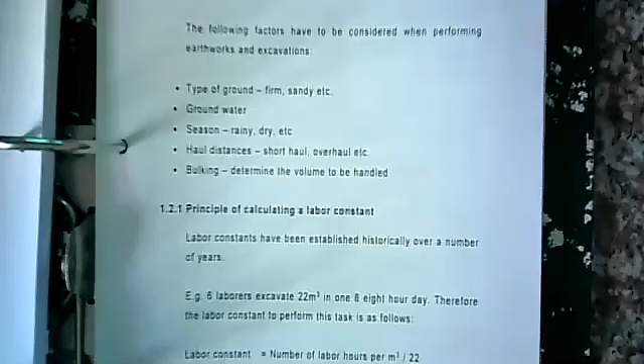Type of ground: firm, sandy. Earthworks excavation is basically governed by the different types of conditions we experience. Now, if your ground is firm, what does it mean? It means that the machine has to work harder.

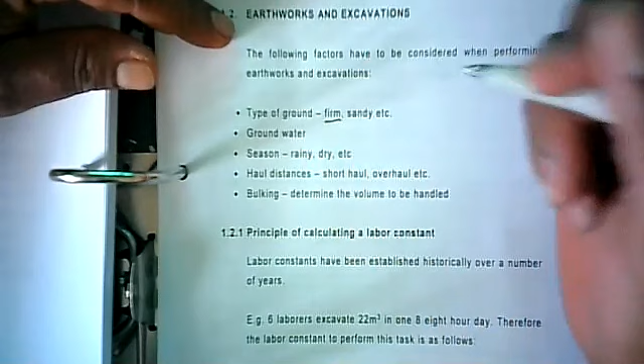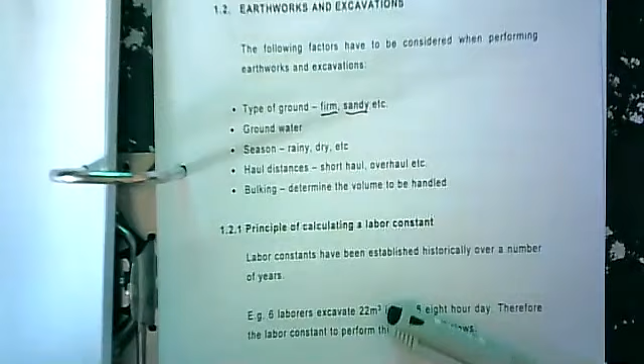Naturally, if the ground is sandy and very soft and loose, the machine does not have to work as hard as it was with firm ground. Now, this has an implication on a couple of things: one, cost, and two, duration. Remember, harder, therefore it's going to take longer.

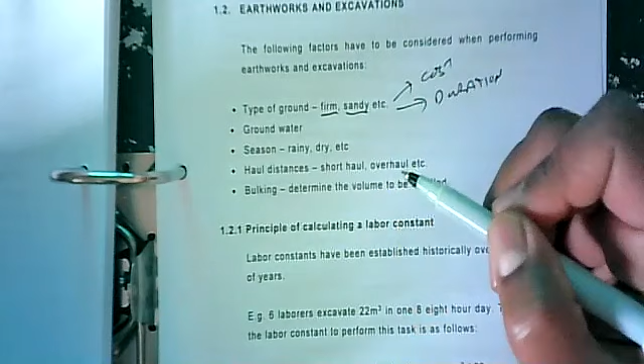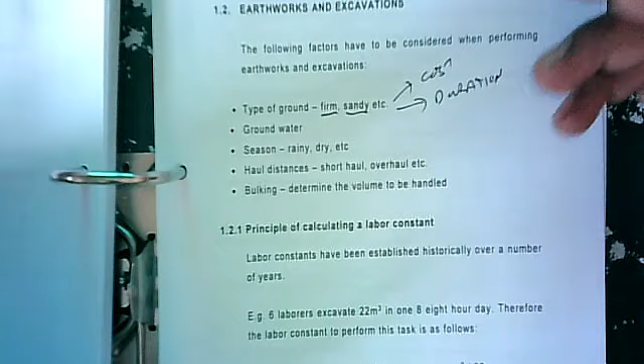And if it's going to take longer, it's going to cost more. Also, if it's harder, it's going to work more, which means it's going to use more fuel at a longer period. So fuel cost is going to go up. Naturally, the operating cost is also going to increase because the time taken is more than it would have been if it was loose soil.

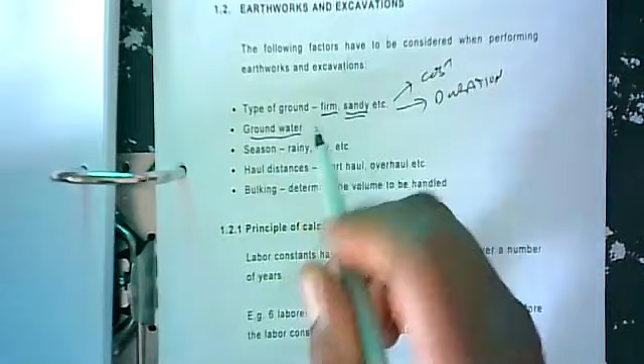Why is groundwater an issue? Firstly, what is groundwater? Groundwater is the water table. Why is groundwater a condition for earthworks and excavation? If you're working close to the ocean, every time you dig a little hole, it fills up with water. You dig a bigger hole, it's going to fill up with water. So to continue working, you have to put in some sort of pump to suck out all that water.

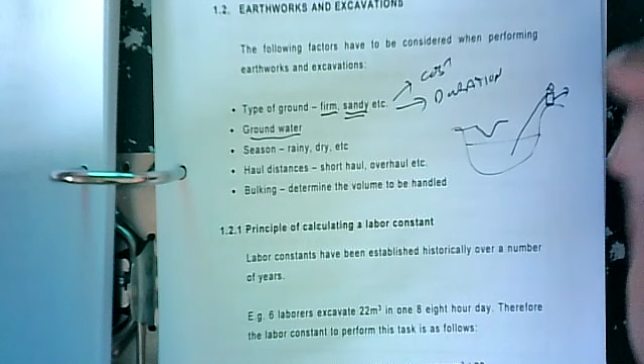So there you go. Groundwater is an issue for earthworks, and in almost all instances it has a cost implication.

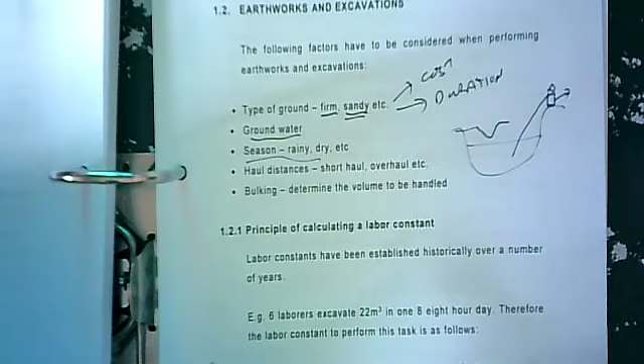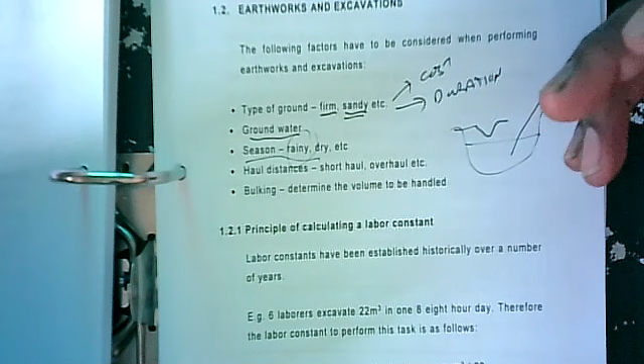Season. Why is season an issue? If it's raining, can you work? Another question: when the rain stops, can you still go back to work? No. If it rained hard enough, then you're going to have to wait for a couple of days for that water to subside, so that the site is actually walkable.

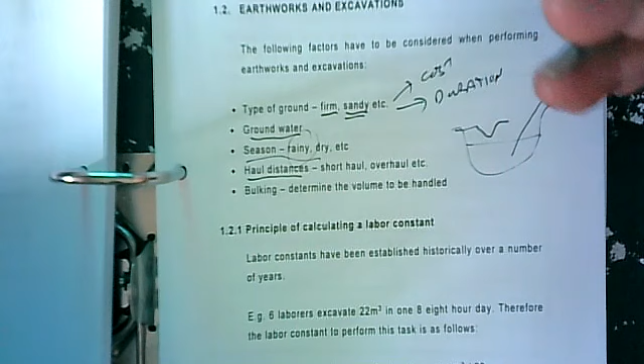Haul distances. Whatever you excavate needs to be taken someplace. Do you take it a few meters away? Do you take it kilometers away? And therefore you see how the cost starts to climb when it comes to earthworks and excavations.

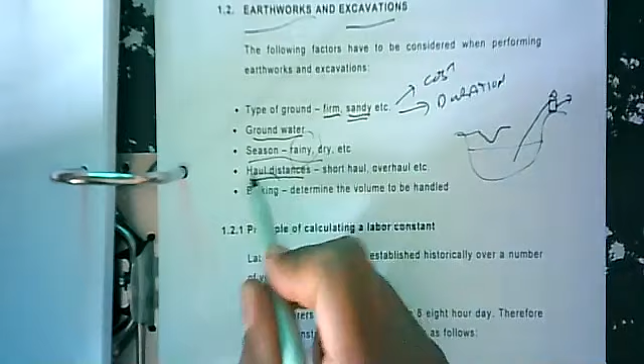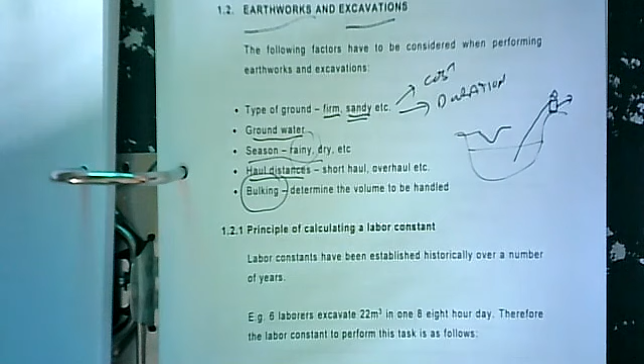Bulking: determine the volume to be handled. We'll talk about bulking when we start the calculations, but bulking is basically disturbing the soil and introducing voids, and that has an implication on volume. We'll come to that in a moment.

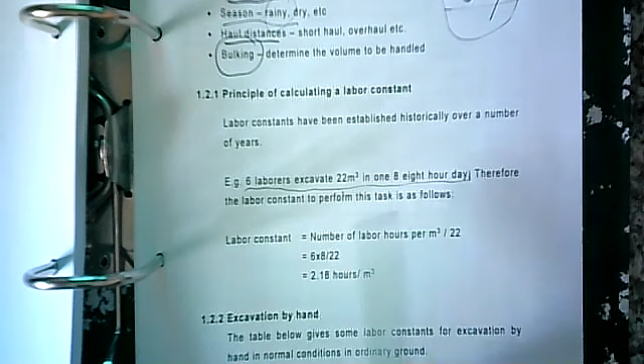Principle of calculating a labor constant. Labor constants have been established historically over a number of years. Example: 6 laborers excavate 22 cubic meters in one 8-hour day. We've established that previously when we started. Therefore, the labor constant to perform this task is as follows: number of labor hours per meter cube divided by 22, and you get 2.18 hours per cubic meter.

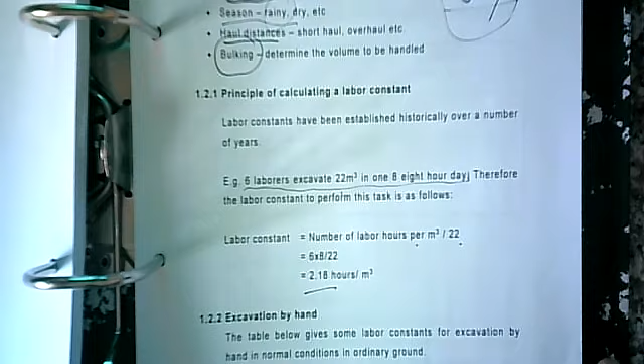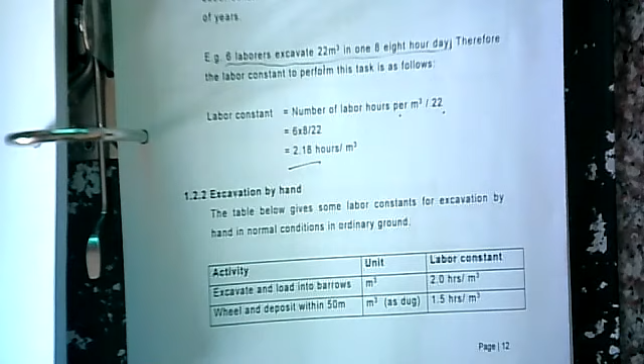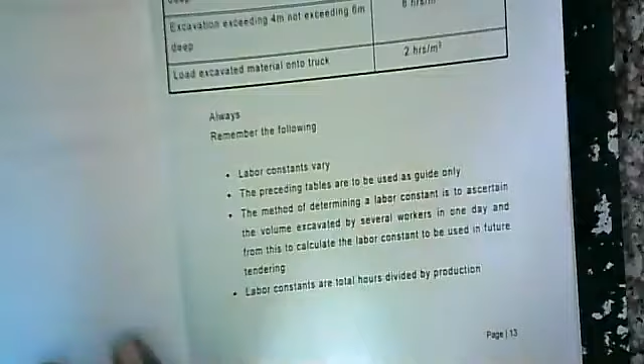Spread and level, return, fill, and compact - other activities when it comes to excavation. As dug, which actually should read something like that.

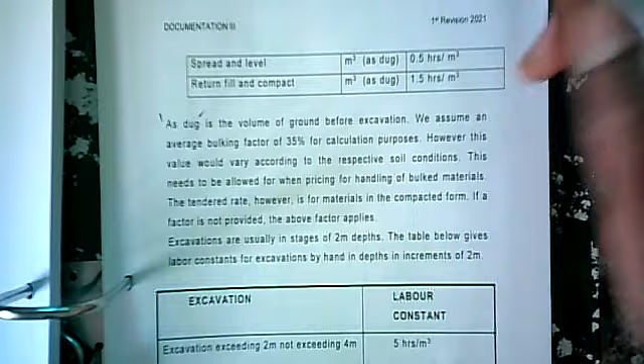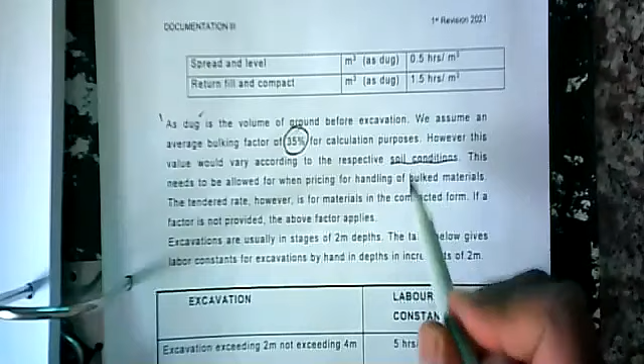As dug is the volume of ground before excavation. We assume an average bulking of 35% for calculation purposes. This is going to change, and it's going to change depending on the type of soil. You will see in the calculation it's coming out. However, this value will vary according to respective soil conditions, as I've already mentioned. This needs to be allowed for when pricing for handling of bulk materials. The tender rate, however, is for materials in the compacted form. That's scary.

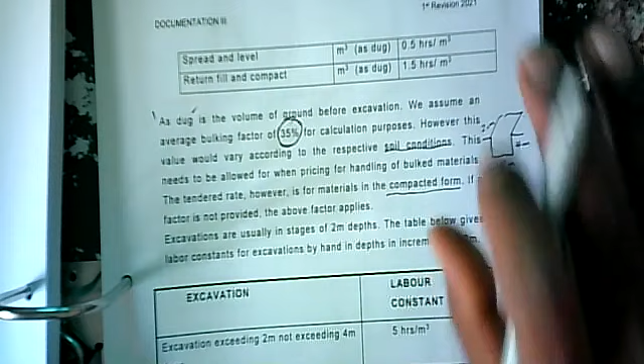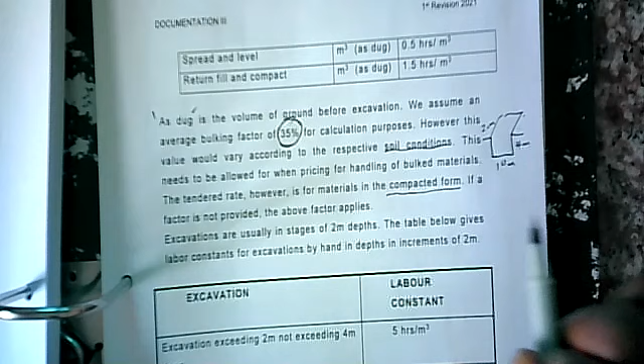If we dig this hole, we know the dimensions, we know the volume, and from that we get volume. I'm only paying for that volume. I don't care if you use 10 trips with 10 trucks, 5 trips with 10 trucks, or 20 trucks with 2 trips. I don't care, I'm paying just for that amount excavated.

That's what this line means, strictly: if a factor is not provided, the factor above applies. So if I don't give you a bulking factor, use 35.

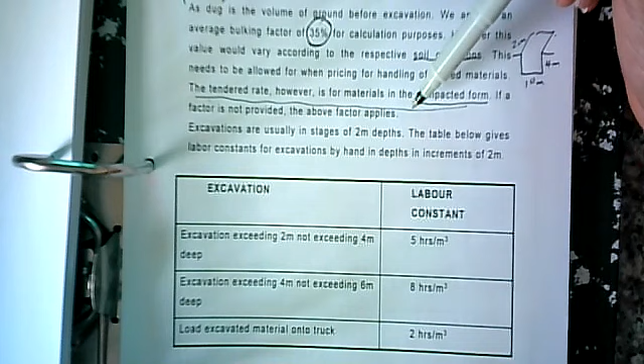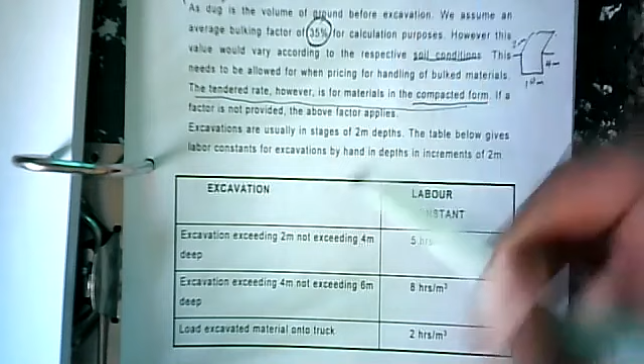Excavations are usually done in stages of 2-meter depths. The table below gives labor constants for excavations by hand in increments of 2 meters: excavation exceeding 2 meters but not exceeding 4 meters gives you limits, 2 to 4, labor constant is 5. Excavation exceeding 4 meters, not exceeding 6...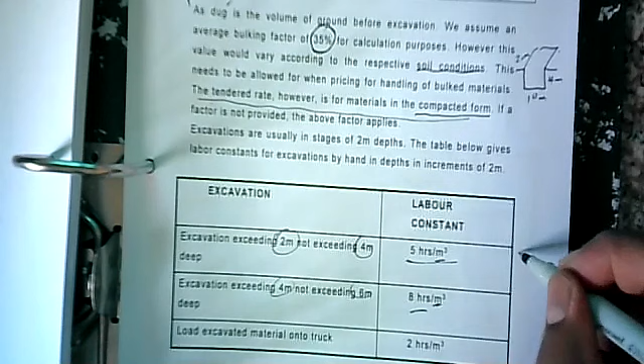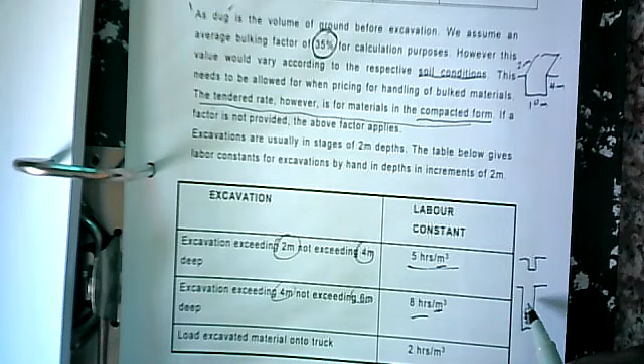What's happening here? The deeper I go, the longer it takes to do 1 cubic meter. Why? Think about a hole like that as opposed to a hole like that. The guy is busy in here with his pick, digging, and then he has to throw it all out. He throws it right there and it falls back in, as opposed to a guy in this shallower hole. Now you see why depth is an issue.

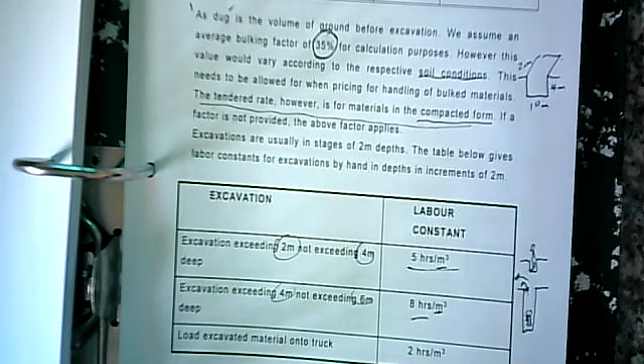Loaded excavated material onto the truck, 2 hours per cubic meter. By then, whatever the material, it's loose, so it's easier to scoop it up and throw it into the truck. Always remember the following.

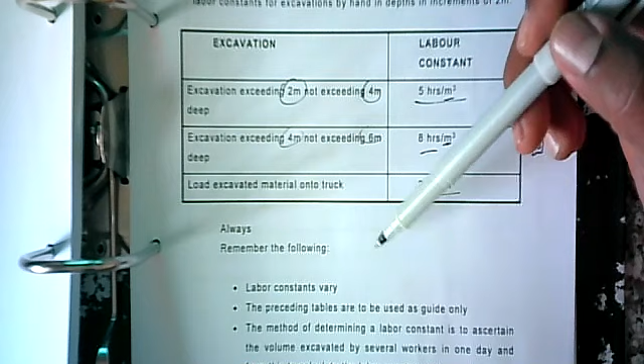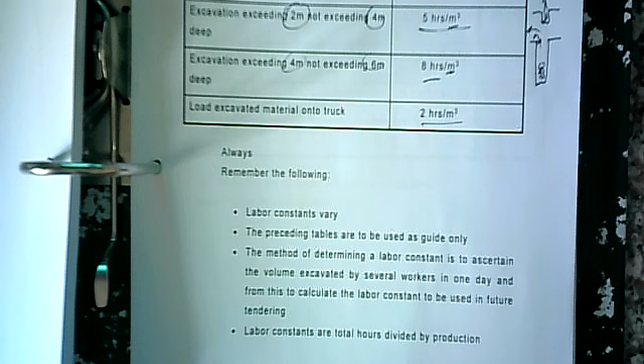Labor constants vary; preceding tables are used as a guide only. The method of determining a labor constant is to ascertain the volume excavated by several workers in one day, and from this calculate the labor constant to be used in future tendering. Labor constants are total hours divided by production.

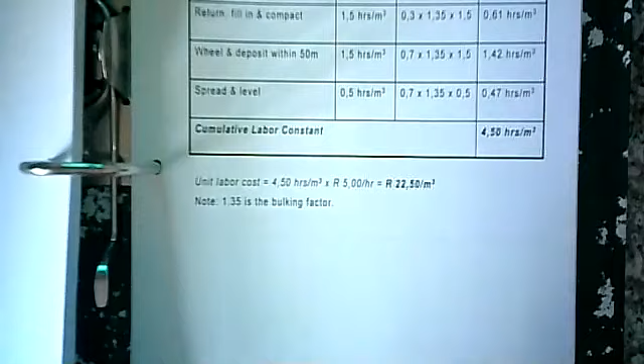Example 1: calculate the cost per cubic meter to excavate a trench 1.5 meters deep in gravel if 30% of the excavation must be returned, filled, and compacted. The rest is to be carted away, deposited, spread, and leveled on site. The soil bulks by 35%, and the labor cost is R5 an hour — very cheap labor.

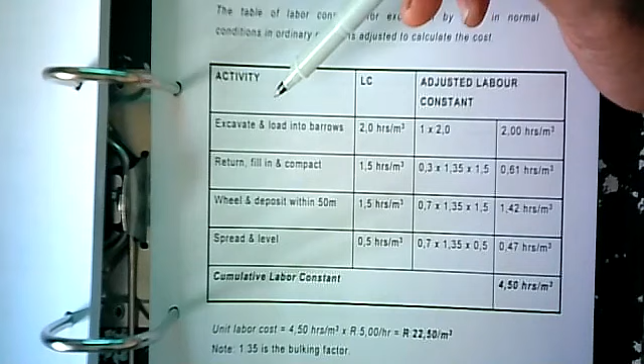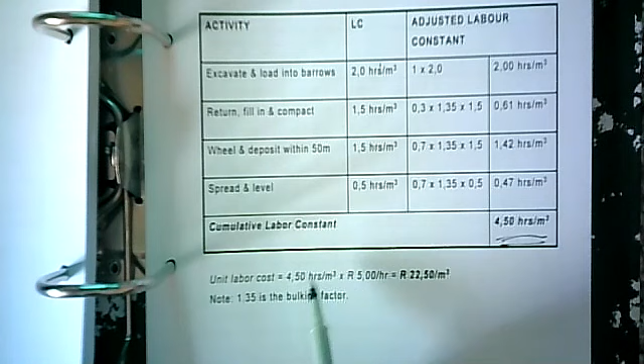Activity: excavate, load into barrows, labor constant — you can see how we arrive at the cumulative labor constant. Unit labor cost equals 4.5 hours per cubic meter at 5 Rand, giving us a cost per cubic meter. We said 1.35 is the bulking factor.

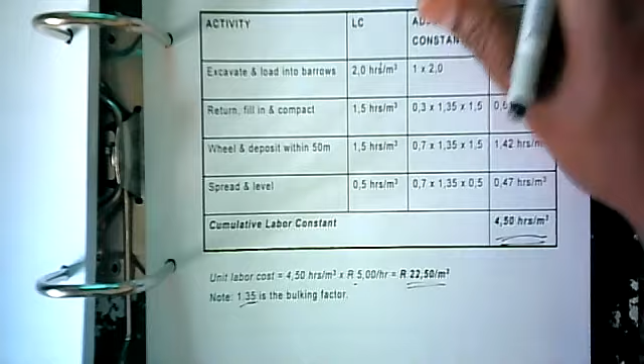I'll be honest with you, this calculation is for illustrative purposes only. I've seldom given you a question in a test or exam of this nature. For example 2, this starts to get complicated now, so let's pay more attention to this particular one.

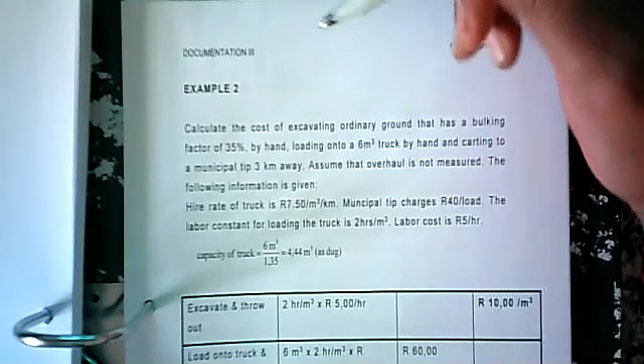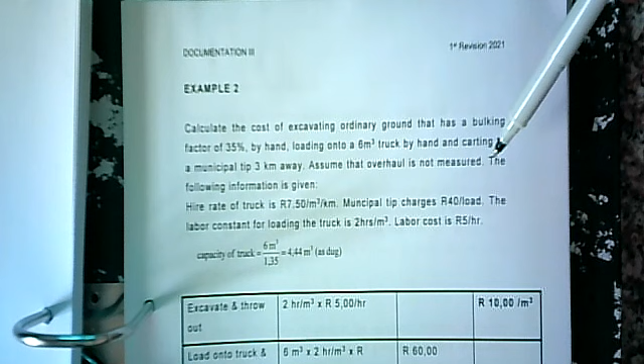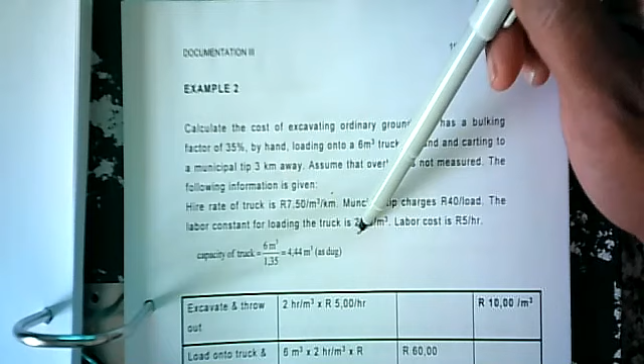Calculate the cost of excavating ordinary ground that has a bulking factor of 35% by hand, loading into a 6 cubic meter truck by hand, and carting to a municipal tip 3 kilometers away. Assume the overhaul is not measured. The following information is given: hire rate of truck is 7.50 Rand per cubic meter per kilometer, municipal tip charges 40 Rand per load, the labor constant for loading the truck is 2 hours, and the labor cost is 5 Rand per hour.

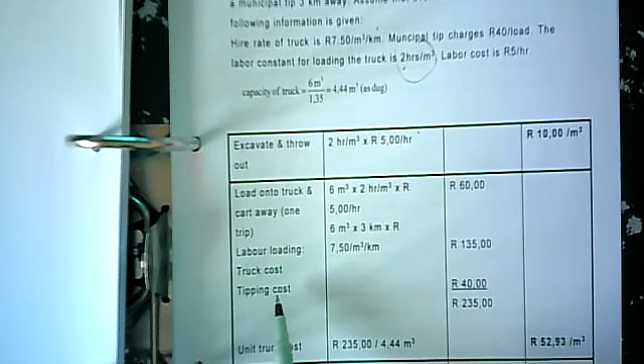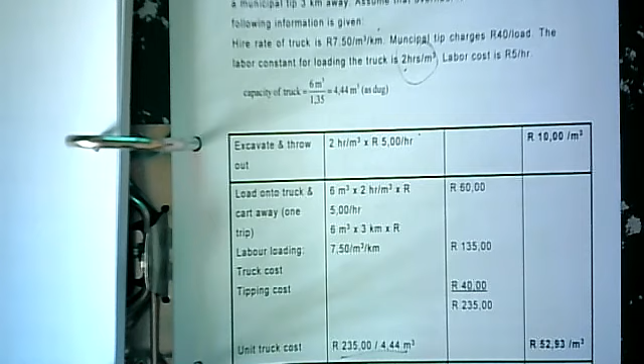So, excavate and throw, you've got something there: 2 hours per cubic meter at 5 Rand — there's a cost there. Load onto truck and cart away, 1 trip: truck, labor loading, truck cost, tipping cost all given in your question. Unit truck cost given, and we arrive at a cost for excavating and carting it away. This, mind you, is done by hand.

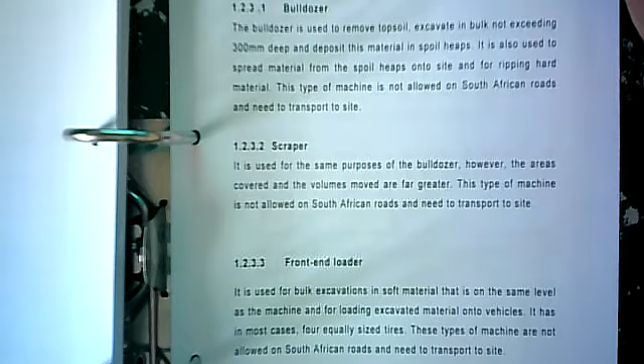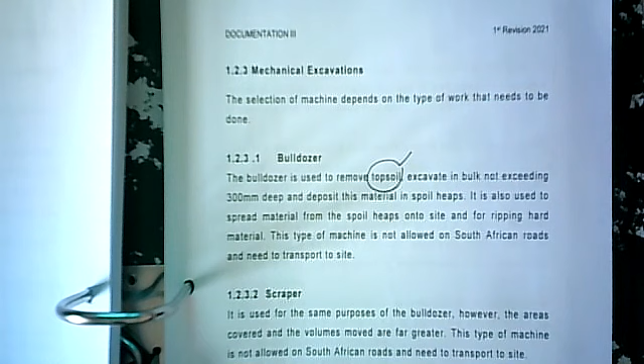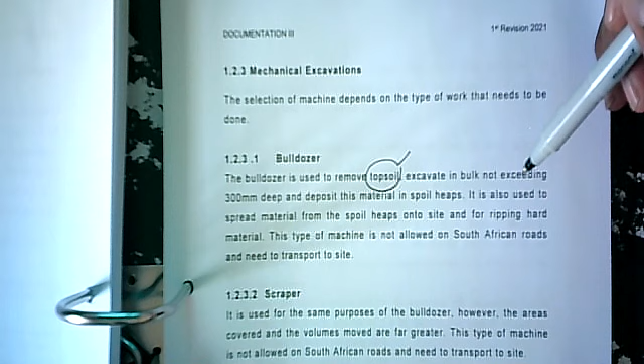Section 1.2.3, page 16, mechanical excavations. The selection of machine depends on the type of work that needs to be done. A bulldozer is used to remove topsoil — we'll start with topsoil quantities and do calculations in this regard. It excavates in bulk not exceeding 300 millimeters deep and deposits material in a spoil heap. It's also used to spread material from the spoil heaps onto site and for ripping hard material. This type of machine is not allowed on South African roads and needs to be transported to site.

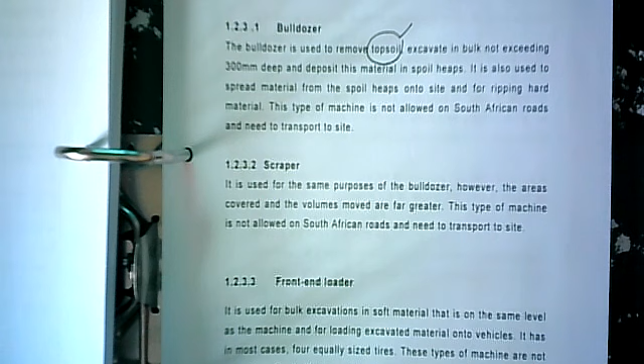A scraper is used for the same purpose as a bulldozer; however, the areas covered and the volumes moved are far greater. This type of machine is also not allowed on South African roads and needs to be transported to site. Front end loader...

It is used for bulk excavations in soft material that is at the same level as the machine, and for loading excavated material onto vehicles. It has, in most cases, 4 equally sized tires. These types of machines are not allowed on South African roads and need to be transported to site.

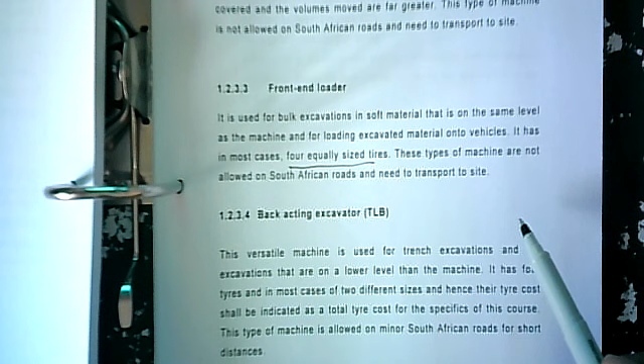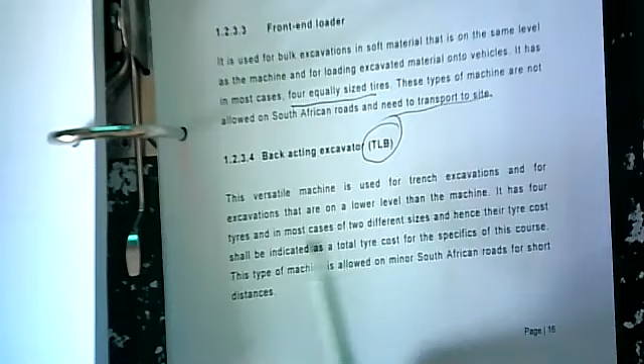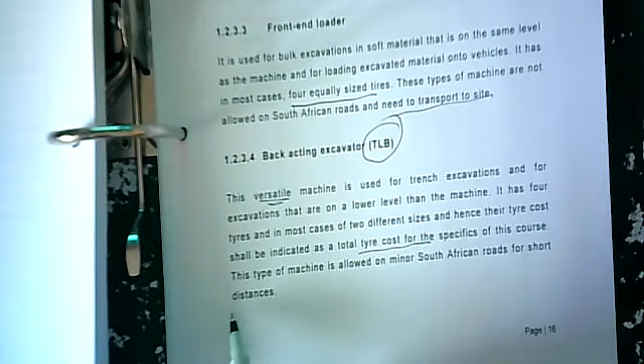All right, back actor or back actor excavator, TLB, a very versatile machine. You see it everywhere on construction sites. This versatile machine is used for trench excavations and for excavations that are on a lower level than the machine. There are 4 tires, in most cases 2 different sizes, and hence their tire cost shall be indicated as a set. This type of machine is allowed on minor roads for short distances. That's why you sometimes have to follow it on the road because it travels very slowly.

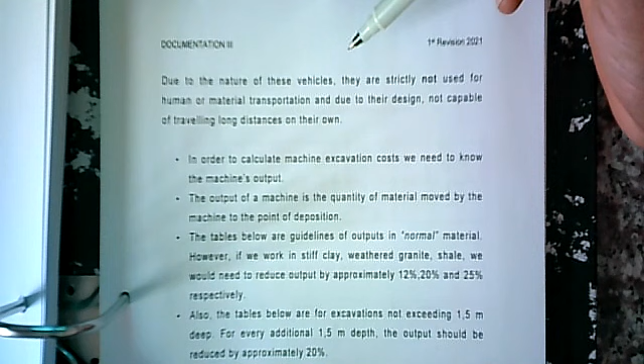Due to the nature of these vehicles, they are strictly not used for human or material transportation, and due to the design, not capable of doing long distances on their own.

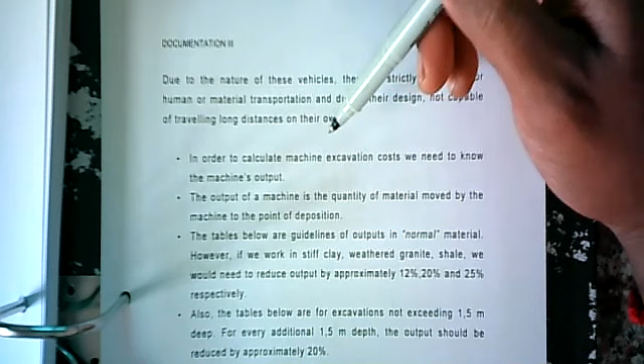In order to calculate machine excavation cost, we need to know the machine's output. Where do we get that from? The output of a machine is the quantity of material moved by the machine to a point of deposition - where we dig it, or we carry it from here and take it there. The tables below are guidelines of outputs in normal material.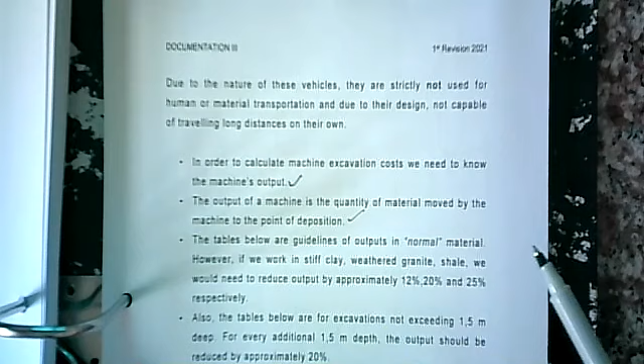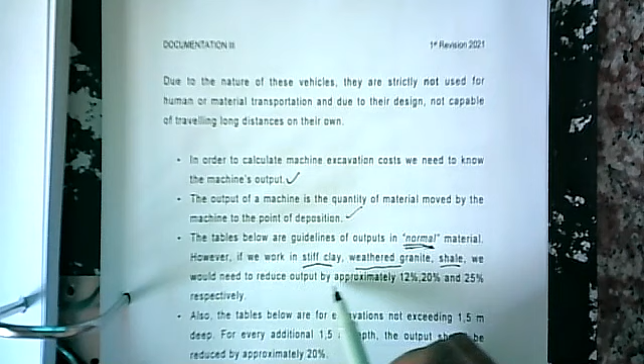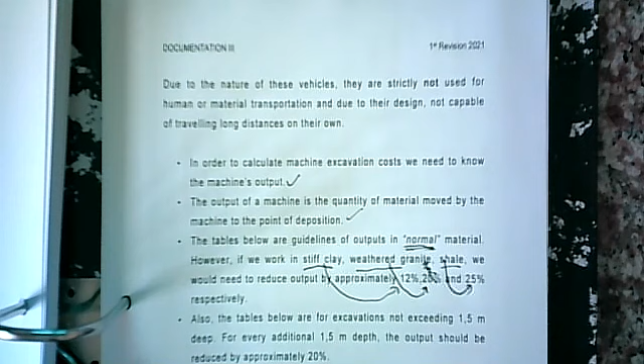Now it starts to get complicated. However, if we work in stiff clay, weathered granite, or shale, we need to reduce output by approximately 12%, 20%, and 25%. Also, the tables below are for excavations not exceeding 1.5 meters deep. For additional 1.5 meters depth, the output should be reduced by 20%. All right, this will all make sense in a moment.

Outputs are measured in cubic meters per hour.

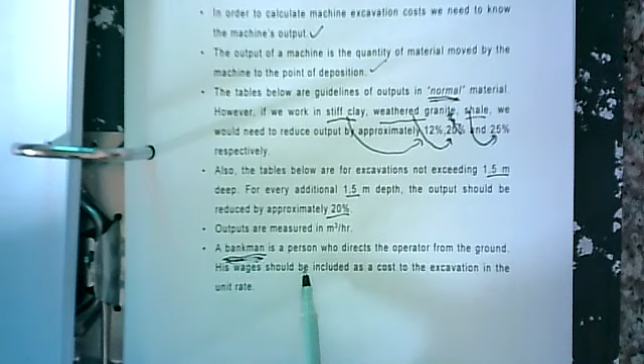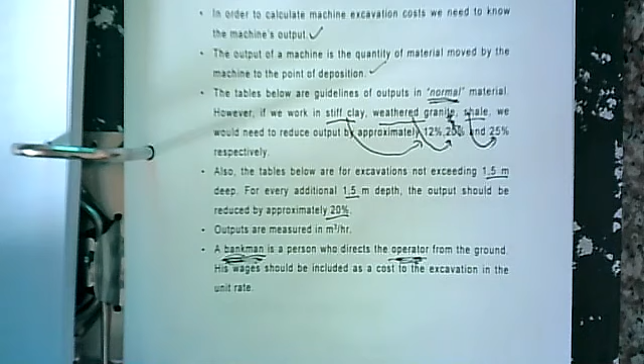A bankman is a person who directs the operator. Remember I said operating cost? We need somebody to use the machine or work the machine, and sometimes he may need somebody to help him, walking on the ground, so he doesn't crash into other items, buildings, or other structures. This is because of his location in the vehicle - it's hard for him to see from the ground. His wages should be included in the cost of the excavation in the unit rate.

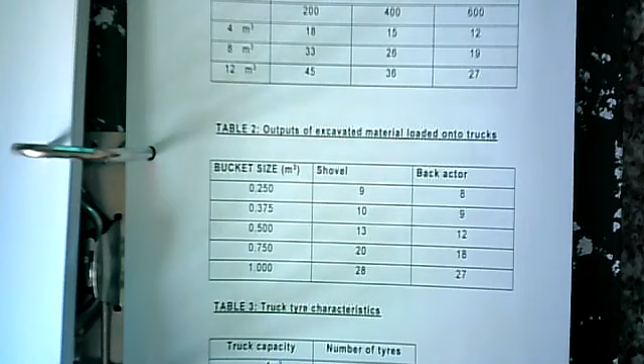All right, here's your tables. This is for your scraper. Let's look at table 2 - the bucket size and the shovel size for a back actor.

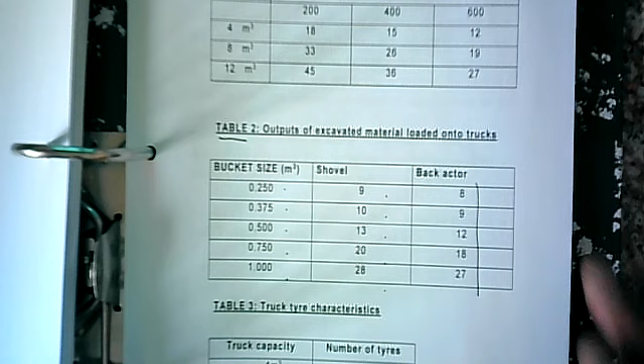Now this is a table that I'm going to give you in your data sheet. Let's look at this one question.

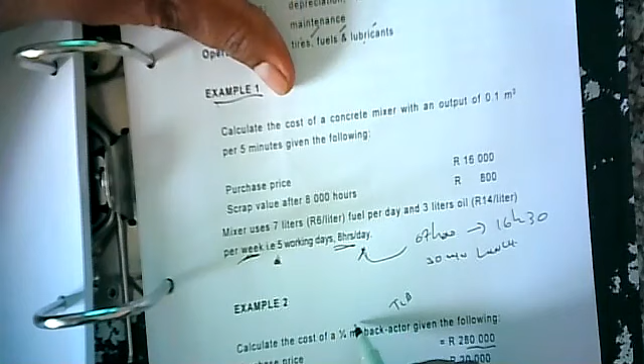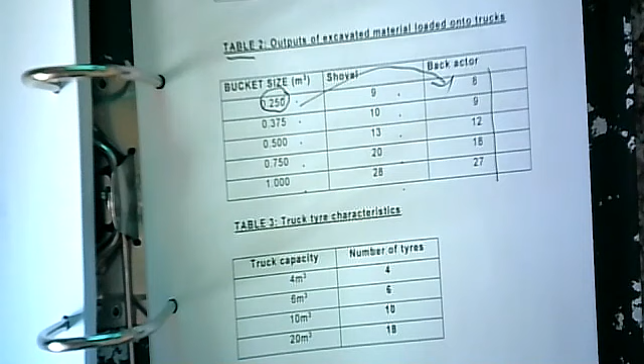Question 2, page 10. I said quarter cubic meter back actor. Remember that? Why did I say that? Because I said the questions are going to get more complicated. If I gave you a quarter cubic meter back actor, you're going to go to this table and look at a quarter cubic meter back actor. This is its capability per cubic meter - 8 cubic meters per hour.

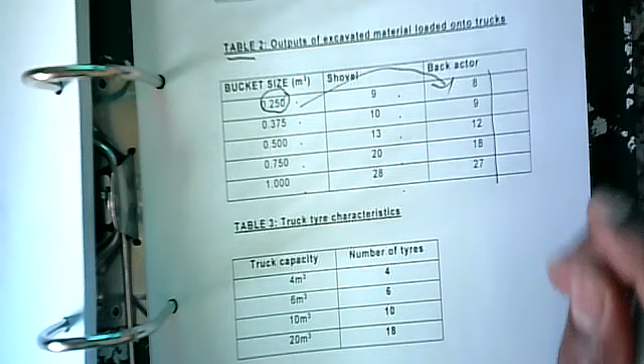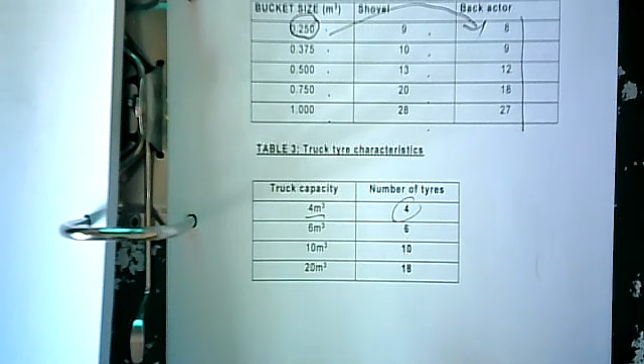That's its capability. All right, truck tyre characteristics. Now, I want to stick to this table. If it is a 4 cubic meter truck, it has 4 tires. If it is a 6 cubic meter truck, it has 6 tires. If it is a 10 cubic meter truck, it has 10 tires.

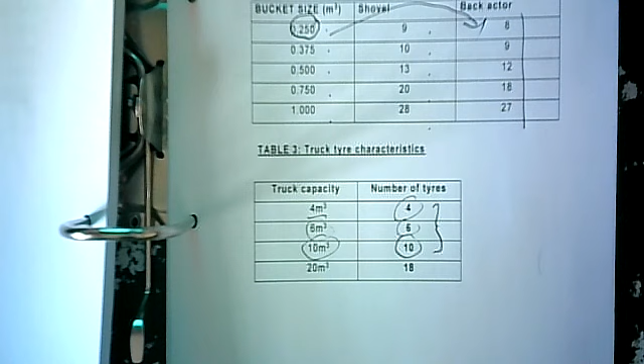The reason I'm sticking to this is because when we ran the national diploma and students came back from their in-service training, some of them worked on construction sites and we had numerous arguments over the number of tires for the volume or capacity of a truck, because on site they saw something else. So I'm going to stick strictly to this for our calculations - I'm not going to deviate. In any event, this table and this table will be in your data sheet.